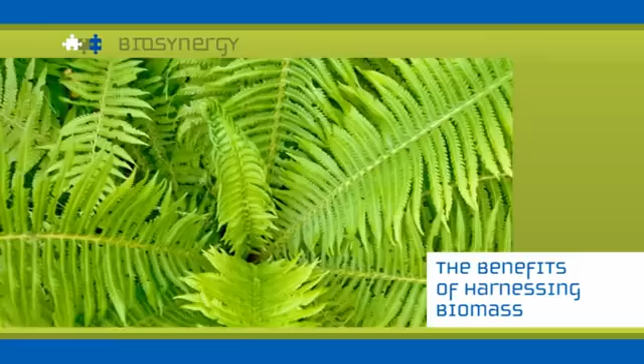The benefits of harnessing biomass are immense. For a start, it will invigorate farming and rural communities. It will reduce CO2 emissions from fossil fuels. It will encourage biodiversity and sustainability, and will improve the security of energy and fuel supplies.

Under the biomass umbrella is a wide array of organic sources, including willow, straw, miscanthus grass, residue from forest management, and even the byproducts of manufacturing such as food or sawmill waste. These sources can be harvested by felling, chipping, combine harvesting, cutting, and clearance.

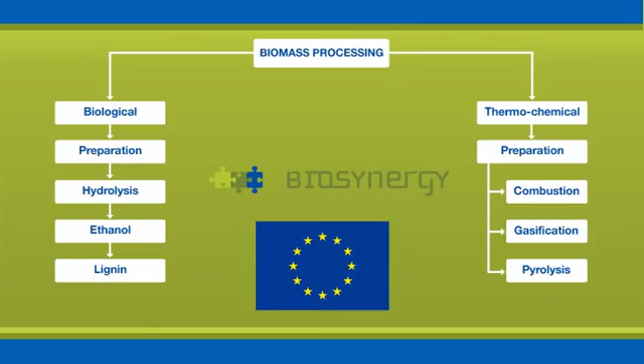Once harvested, they need transporting to where they can be pre-treated. There are two main routes when it comes to processing biomass, either biological or thermochemical. These processes are at the core of the Biosynergy project, which the European Commission has sponsored.

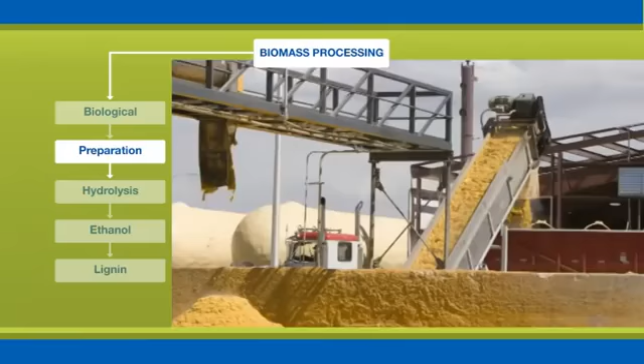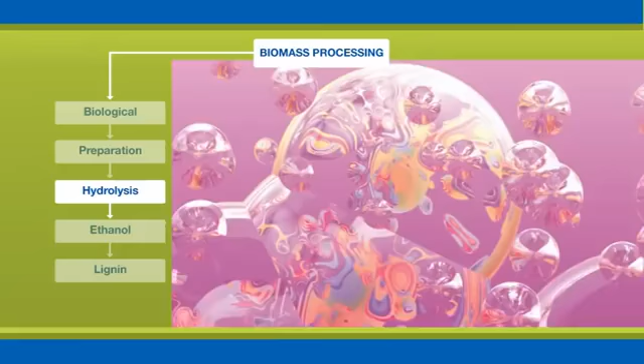The biological process firstly involves pre-treatment, in which the biomass is received, handled, stored, dried and reduced in size. Next, hemicellulose and cellulose are converted by a process of hydrolysis using acid or enzymes. This creates sugars, which are fermented to produce a dilute product from which ethanol is separated.

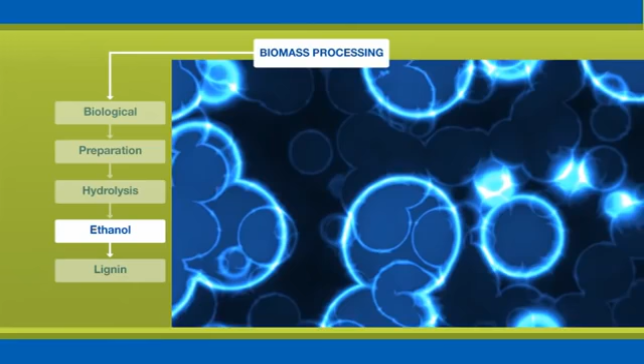The ethanol produced can then be used as a fuel in its own right, a fuel additive, an industrial solvent, or processed as a petrochemical to produce other specialty and commodity chemicals, which can be used to make a wide range of consumer products. A byproduct of hydrolysis is lignin, which is used in the production of transport fuels and specialty and commodity chemicals.

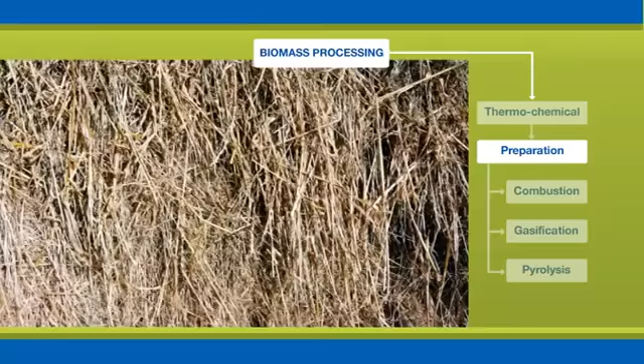The thermochemical processing is different in that high temperatures are involved, but again involves pre-treatment in which the biomass is received, handled, stored, dried, and reduced in size.

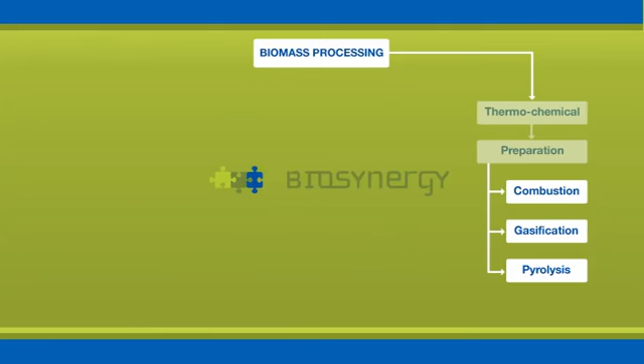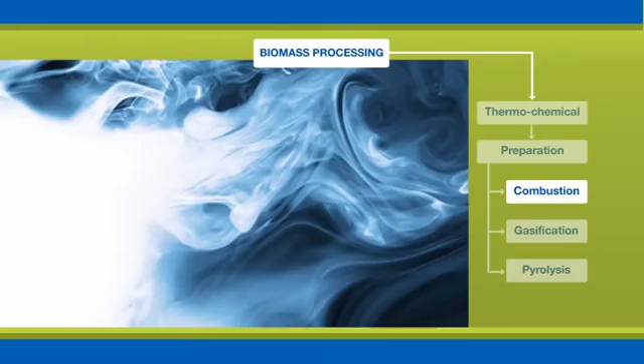It then goes through one of three different types of thermochemical processing: combustion, gasification, or pyrolysis. Combustion is used to generate heat, which produces steam, and this in turn drives turbines to generate power.

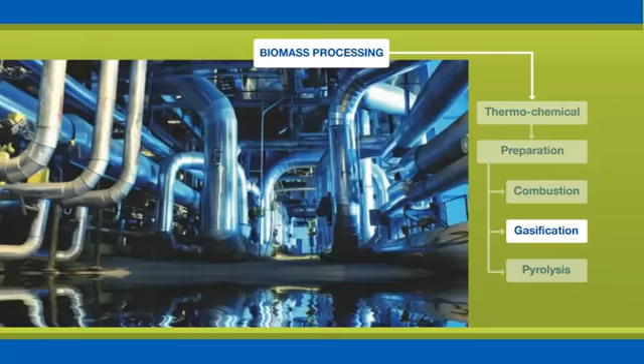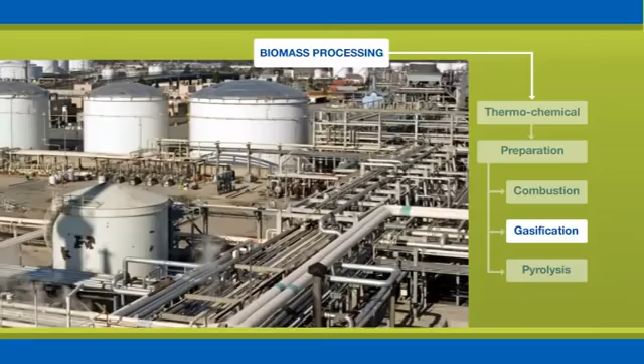Gasification turns biomass into fuel gas or synthesis gas. Fuel gas is used to generate power and heating, while synthesis gas is used to manufacture synthetic transport fuels and bulk chemicals, which can then be refined to produce specialty chemicals, chemicals such as polymers used in the manufacture of consumer goods.

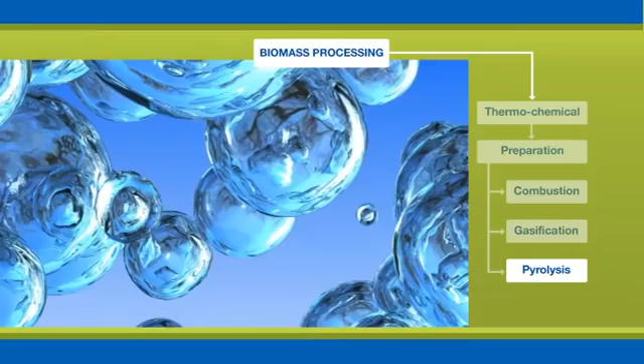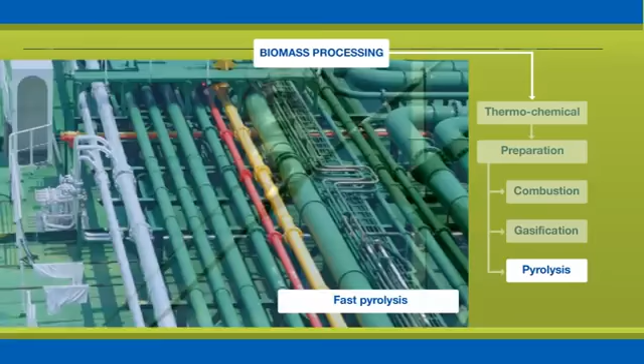Pyrolysis encompasses a number of varying processes. Fast pyrolysis produces high yields of a high-energy liquid that is cost-efficient to handle and transport. This can be used directly for heat and power, or to produce chemicals such as adhesive resins for wood panels. It can also be processed further by gasification.

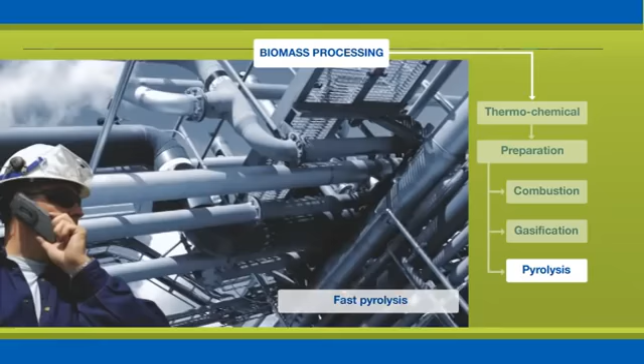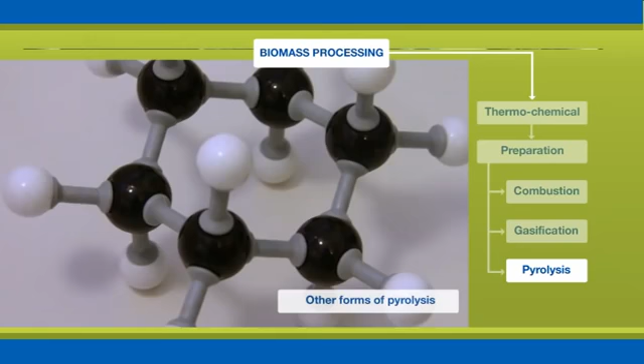Low-temperature pyrolysis, or torrefaction, also prepares biomass for gasification and improves its quality. Various other forms of pyrolysis, intermediate and slow pyrolysis, also produce gas, liquids and solid that can be used in analogous applications such as acetic acid.

So, what do these conversion and upgrading processes actually produce? For a start, they produce heat and power, either for industrial and domestic use, or for use in the biomass conversion and upgrading processes.

Secondly, they produce transport fuels, either by blending bioethanol with fuel, or using it as a fuel in its own right, or by using hydrocarbons to produce synthetic diesel and gasoline. Thirdly, they produce specialty and commodity chemicals which can be used to manufacture a wide range of products for use in industry and ultimately in consumer goods.

It's essential, of course, that we get the most effective output from processing biomass. And to achieve this, we need to look at integrating the biomass processes in order to optimize the range of products they generate.

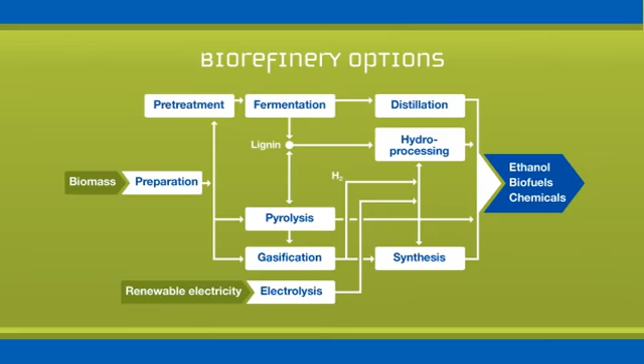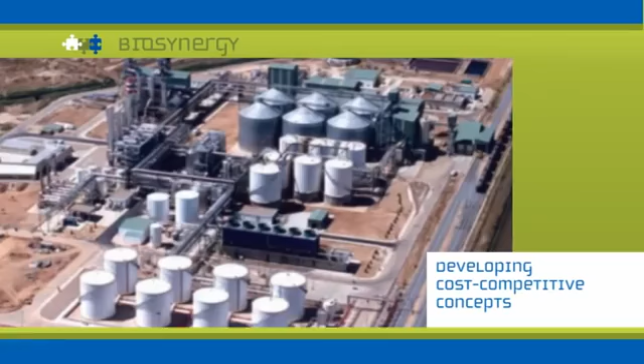In essence, this means developing integrated biorefineries capable of producing a similar range of products to those produced by conventional petrochemical refineries. The concepts we develop for biorefineries also need to be as cost competitive as possible, and this can be achieved by using as much of the biomass as possible.

One aim is a design for an integrated lignocellulose biorefinery based on the straw-based bioethanol demonstration plant of Abengoa Bioenergy in Salamanca, Spain. An example is provided in this diagram.

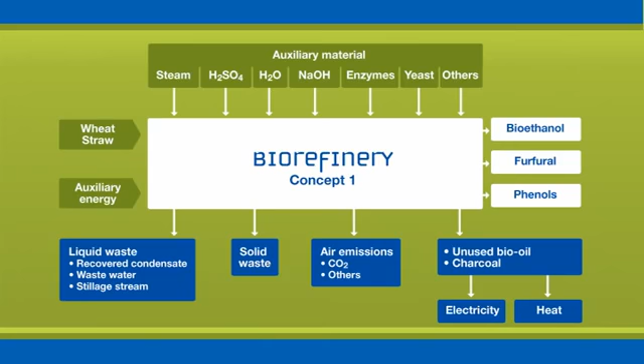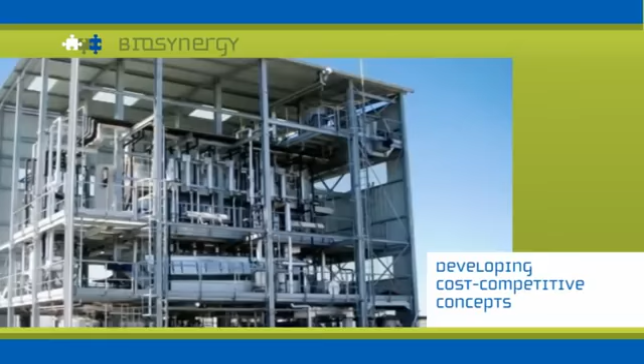At present, we are evaluating 5 different methods of straw pre-treatment for the production of fermentable sugars, each differing in performance and cost. The optimal process will depend on the processing destination of the fractions and the envisaged end products.

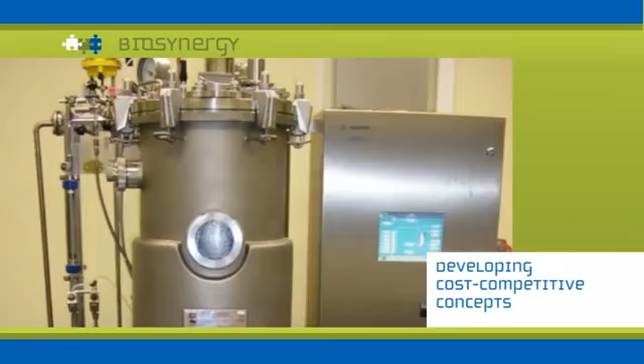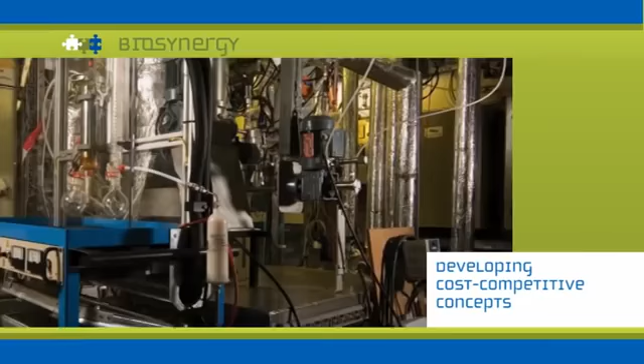As well as producing ethanol by fermentation, we are also investigating other biochemical processes that produce acetone, butanol, and other platform chemicals. Another idea is the development of thermochemical conversion integrated with separation technologies.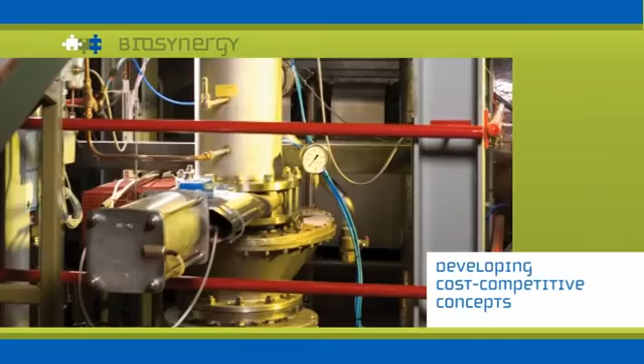For example, thermal conversion by gasification produces synthesis gas, which can be converted into ethanol, methanol, diesel, and gasoline. Thermal conversion by pyrolysis produces a liquid oil, which can be used as an energy carrier that can be upgraded into refinery feedstock material for the production of transport fuels, and can be used as a source of commodity and specialty chemicals.

A key byproduct from bioethanol production is lignin, and we are investigating this as a feedstock for resins and phenol for polymer synthesis, while potential chemicals from the hemicellulose fraction include surfactants and furfural.

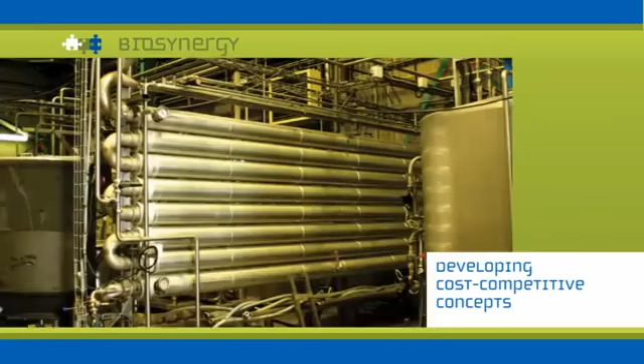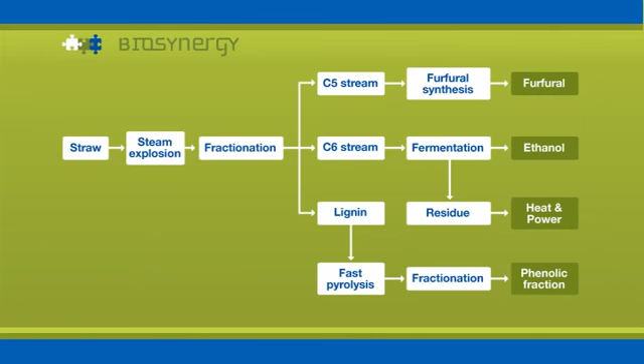At present, we are evaluating all these process concepts in order to identify the most promising biorefinery chains in terms of performance, energy efficiency, environmental performance, cost, and socio-economic contributions. This will entail several of the best performing biorefinery processes being tested at pilot plant scale.

It all sounds workable, but there are a number of challenges ahead if we are to seriously consider biomass as a sustainable energy source for the future. For example, where do we source biomass without damaging local economies and areas set aside for food production and feedstock? How do we reduce processing costs? And how do we integrate products into the supply chain and get them to consumers?

How do we go about producing multiple products, making the whole process more cost efficient? And what is the overall life cycle impact, taking into account use of land, cost of processing, the carbon footprint, and the socio-economic benefits?

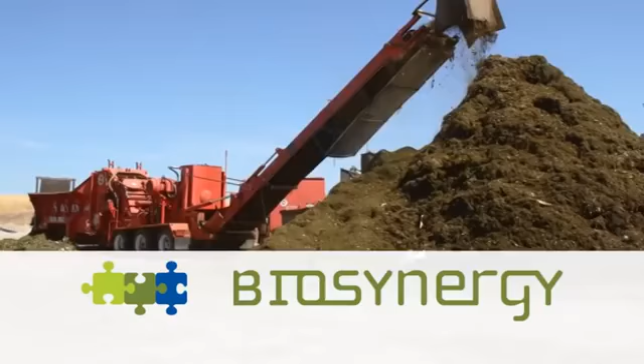These are the challenges Biosynergy needs to overcome if we are to optimize the range of products that can be derived from a biorefinery and provide future generations with a viable and sustainable biomass resource.

The Biosynergy Consortium consists of 17 complementary partners with a high level of industrial participation. There are 3 companies, 8 research institutes, 2 universities, and 4 SMEs. Each is a market leader in their respective fields of innovative technology development and implementation.

Biosynergy has a total budget of €13.4 million, an EU grant of €7 million, and is coordinated by the Energy Research Centre of the Netherlands.